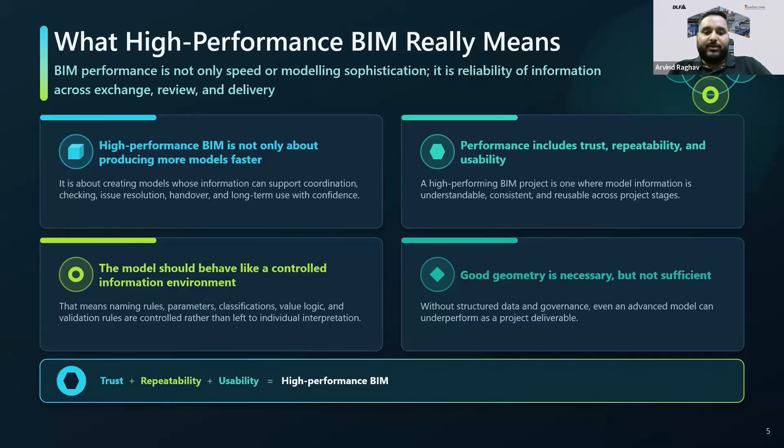So since, Arvind, we are talking about BIM performance, in your experience, what is the biggest source of BIM performance loss in any environment? Is it just the unclear requirements, inconsistent authoring, or just bad checking? Yes, I think it's a mixture of all of them, what you have mentioned, because it's not just about one thing. This is what I have also covered in the presentation. So basically, BIM projects lose performance because of, I think, four main reasons.

So the requirement is mainly: why do we need a BIM model, why do we need to create a BIM model, and what kind of information requirement we will have from the model is normally trapped inside documents. So whenever we do any particular project, we always create EIR, BEP documents, and all of these documents. But ultimately, we both have worked in the industry, and we have seen that the majority of these documents are created in the initial stage of the project.

But when the project moves at a faster delivery pace, especially in Indian projects, nobody really looks at those particular documents after a certain stage. So that is one of the major challenges, where we have defined initially what information we require and everything, but we don't look back to those particular requirements. So that is one case scenario where we lose the overall performance.

Then the quality checks nowadays are more or less manual and more or less reactive. Once we find out that there are a lot of clashes, or maybe the quantities are not matching somehow, or there are some errors in the model, then we try to find out what's the issue, why these quality mistakes happened, or why we are not able to use the model for handover purposes, for different data extraction.

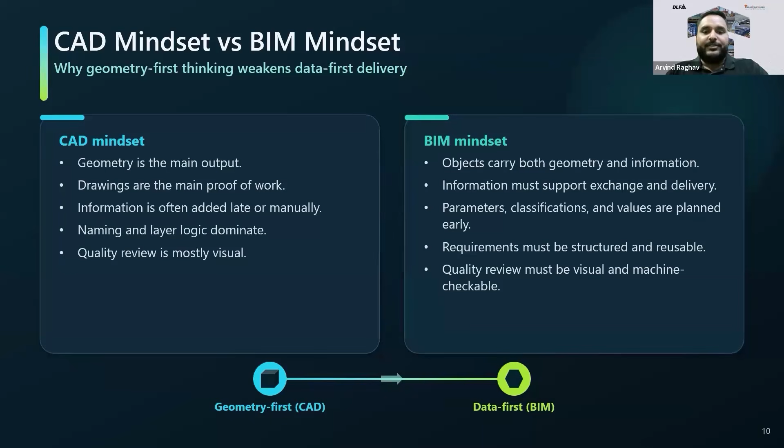So this is how the CAD and BIM mindsets differ from one another, and we all need to think about shifting the mindset instead of just adopting different software.

Can I just ask you a question? We have a lot of architects, generally, as students. So they would be the initial model authors for any project. What is your recommended software? Let's say it's a very, very early stage of a project. They are going to conceptualize it. What is the recommended software from your end that they should start with, and then they can proceed with Revit or other software?

That's a really good question. Personally, I have also implemented this in one of the organizations where I worked. Autodesk Forma is a great tool which I personally prefer for concept modeling. I will tell you exactly why. It's not that it has some magic feature where you just type and it will create. No, you will have to create something yourself. But the best thing about it is that it is connected to the entire BIM workflow.

So if you create anything in Forma, the way of creation for an architect who wants to create a concept stage model or a design option is the same as in SketchUp or any other tool. It is very similar. It takes the same amount of time as well. In fact, I would say it takes a little less. It will not take more than that.

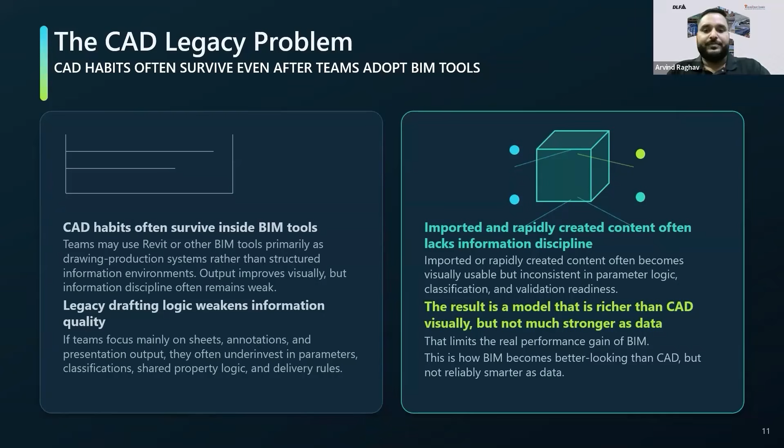So now coming on to the fourth segment of today's discussion, which is basically what BIM data governance means in practice. We have talked a lot about what it should be and why it matters. But now we'll go on to how this will actually look in an actual project, or how we can implement what we have talked about today. Before jumping to that, we need to understand what data governance actually means in BIM.

Data governance is often misunderstood as bureaucracy or documentation overhead, which is slightly true as well. But in reality, it is project information quality at scale. It makes the project predictable. It tells teams what data matters, how it should be structured, who owns it, and how it will be checked. Correct. All of this is basically data governance. It is not just creating a document defining what needs to be there.

So, in a high performance BIM environment, governance is what allows the quality to be repeated across projects instead of just relying on an individual effort. So, for organizations who are working on multiple projects of similar types, data governance is the most important thing when they are implementing BIM.

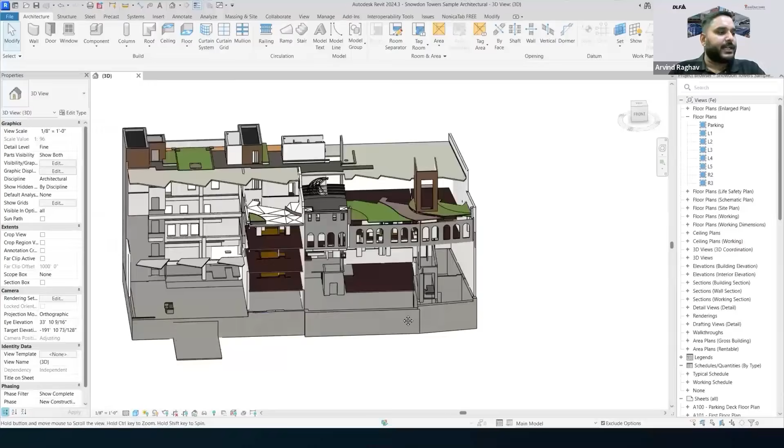Now we'll come to the interesting part. So I will just share my model on the screen. So this is a standard Autodesk marketing model, not a DLF model. So in this, let's understand two things. One is, let's say we want to check whether the required information is there inside the model elements or not. As we were taking the example of the door during this class, here also we'll take the same example of the door.

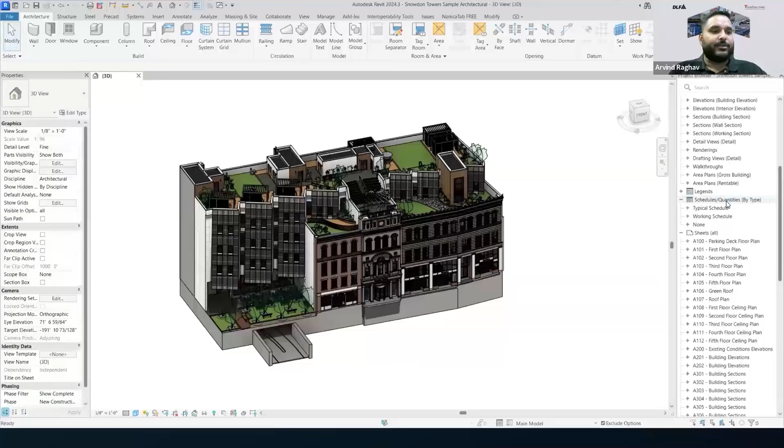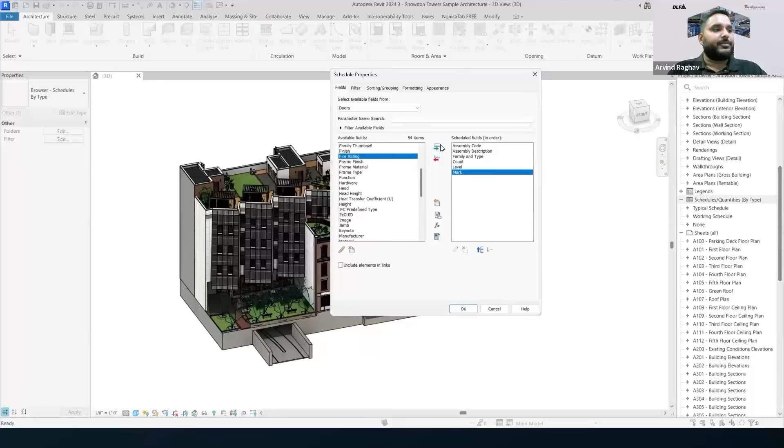So first of all, let's create a door schedule so that we get the different data that we require. We'll go to the schedules, select the door, and then we get the options to choose which properties we need in our schedule. So we'll choose the family and type, then the count. We also need the level at which the door is and the mark value. And let's also take the fire rating value. Just click OK and you will see the schedule.

Now we need to sort this schedule first of all according to the level so that we are able to understand it in a systematic manner. So this entire schedule of doors in this model is now structured according to the different levels. Let's say on level R2, which is roof 2, we have these many doors. Each door has an individual mark value, and the fire rating is also defined. And you can also see that in some of the doors, it is not defined.

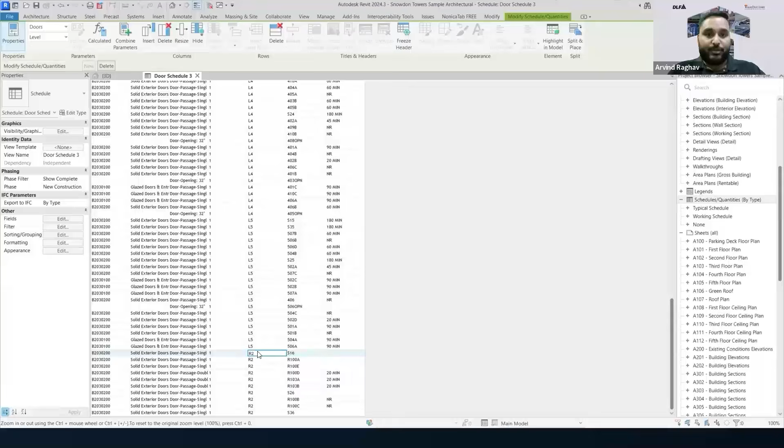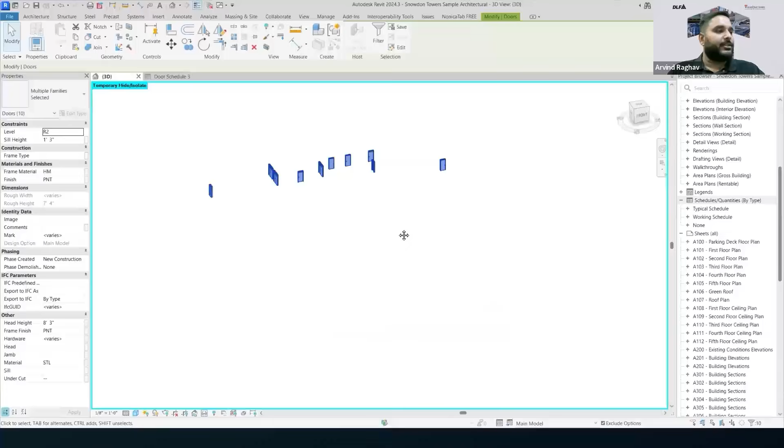It is blank. So let's say we have to check on R2 level doors how many doors have the defined value, whether it is correctly defined or not, whether it is in the format that we require, and whether it is empty or not. So I will just select all the doors over here and hide isolate so that we can only see those particular doors.

Because for today's session I do not have access to the Solibri and BIMcollab platforms, I created a Dynamo script in the morning so that we apply the rule set that we have for IDS through Dynamo. The same thing will happen in Solibri and other platforms. It's just that they have an inbuilt script where you define your rule sets, the requirement and how you want to check the data. That thing we have manually defined in Dynamo.

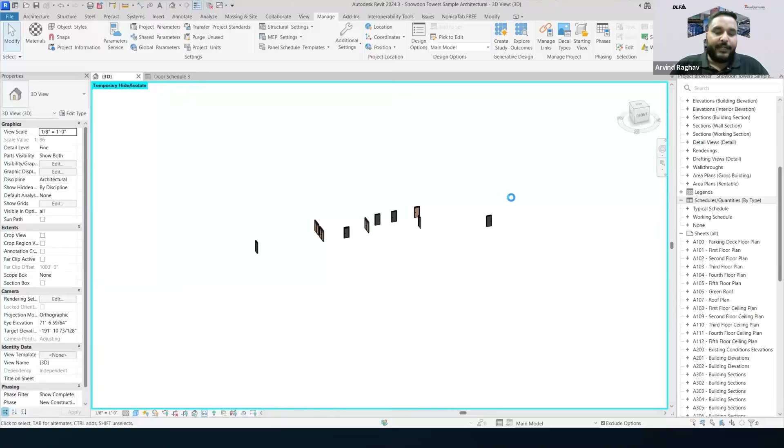It is taking some time to open, and Dynamo, for me, is a very unpredictable tool. Yeah. You never know when it's gonna work. Yes.

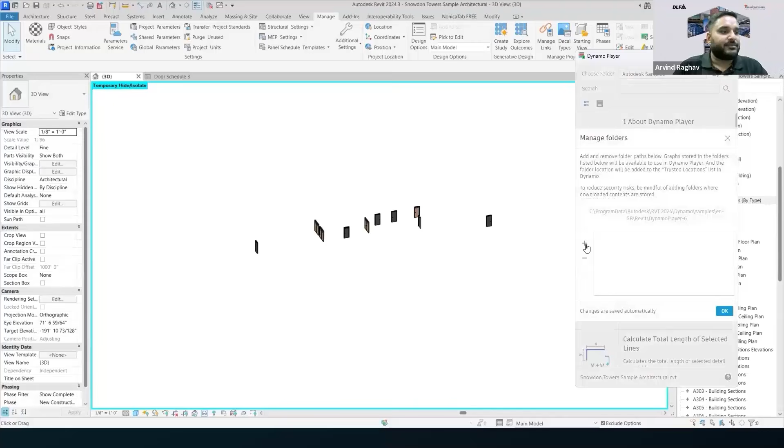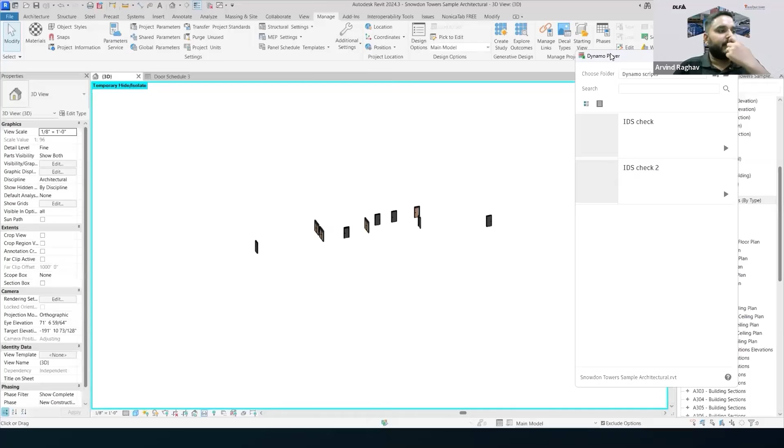Okay, for now, because the Dynamo window is not opening, let's go to the Dynamo Player so that we can run our scripts. Here are the scripts. For this session, I created two different scripts with different rule checks or requirements that we need. So the first requirement that we are going to check is, let me just try if it opens from here or not. It's not opening. That's okay, I think we can run the script.

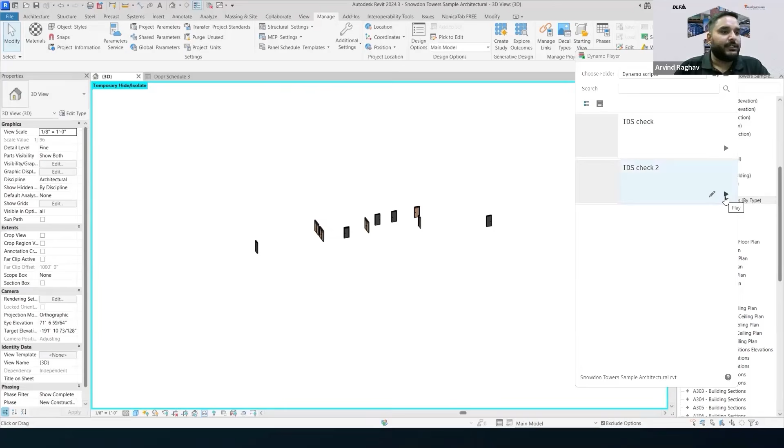Yeah, definitely we can run the script, but I wanted to show inside the script what exactly we are running for, and we need to change the values as well. Let me try to reopen it. According to your rule set, you have to adjust the values, I believe. Yeah, according to the rule sets, we have to adjust the values because we're not using the actual platforms for IDS, so we do not have a user interface to change that.

Correct. So in Dynamo, you can directly change it inside the script. That's why Dynamo is very unpredictable. But this will open up at a much faster rate when it is not in a master class, when you're sitting alone and working, this opens up instantly. When I was actually creating the script, it just took me around an hour to create it, and it was working perfectly fine. In fact, I checked it multiple times that it should work at the right time, in the right manner. But yeah, it's very unpredictable.

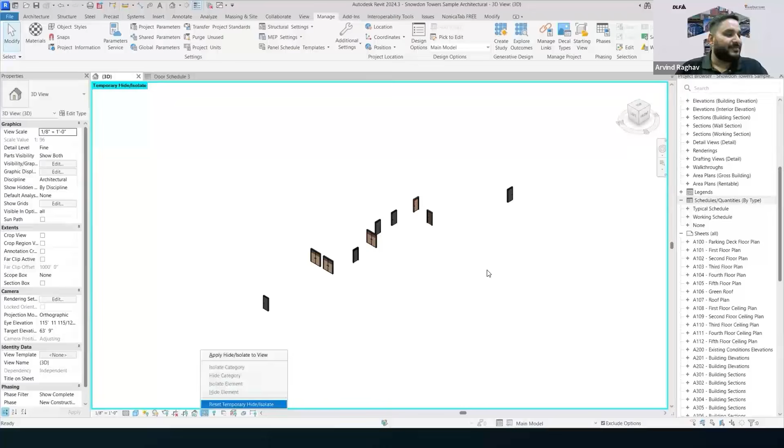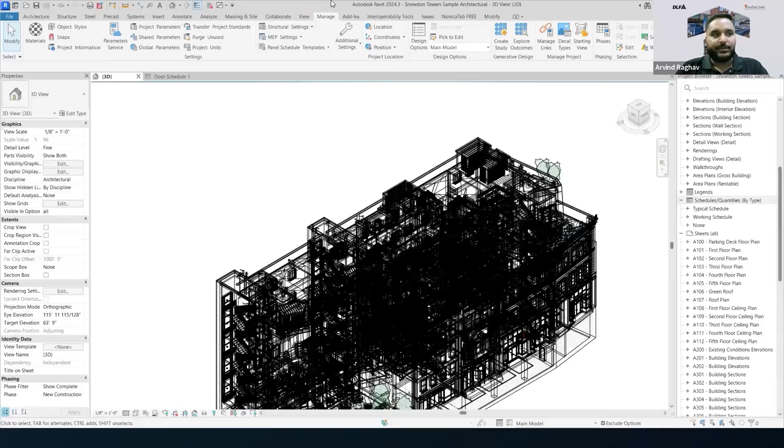Okay, I think we should continue with the presentation. In the meantime, Arvind, what you can do is keep the view as hidden line or something, that will reduce the load on graphics, and then try opening up Dynamo. All right, I will try to keep it open in the background. We need to continue with the presentation. If it opens up, I will show it in the middle. Sure, otherwise let's continue. That's just bad luck.

Can you just at least explain the logic to them? Yes, yes. So what exactly I was going to showcase in the demo was we were checking the different doors in one particular level for different parameters.

We were checking for the fire rating parameter and the mark value. So for the fire rating parameter, we were checking which all doors have it. We had two different rule sets. One rule set was checking for the specific information of which doors have a 90-minute rating, a 60-minute rating, a 45-minute rating, or a non-required one. In rule one, we were checking the specific requirement and how many doors pass that particular requirement and how many doors fail it.

So what the Dynamo script would do is all the passed doors will turn into green color and all the non-pass or failed doors will turn into red color, so it's easily identified in a 3D view which door needs to be corrected. The color of the door would change so you will be able to easily identify which door needs to be corrected. So that was one rule set.

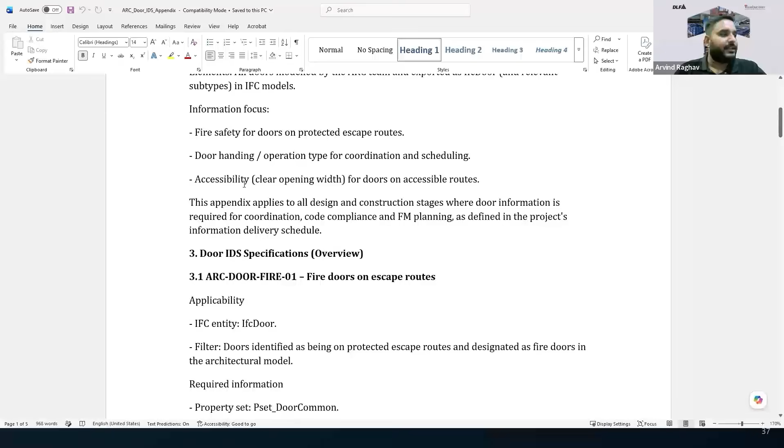A lot of times we see that BEP is normally not written in a particular manner. So in the BEP, I've created this document only for architecture doors because we were talking about doors today. But in this same manner, you can define it according to different disciplines or project requirements. So the first is the purpose, then the scope, what it applies to, different things, then the particular specifications of different elements.

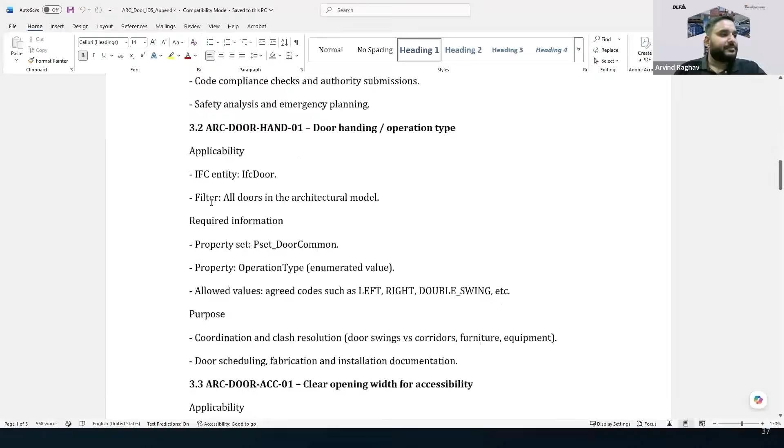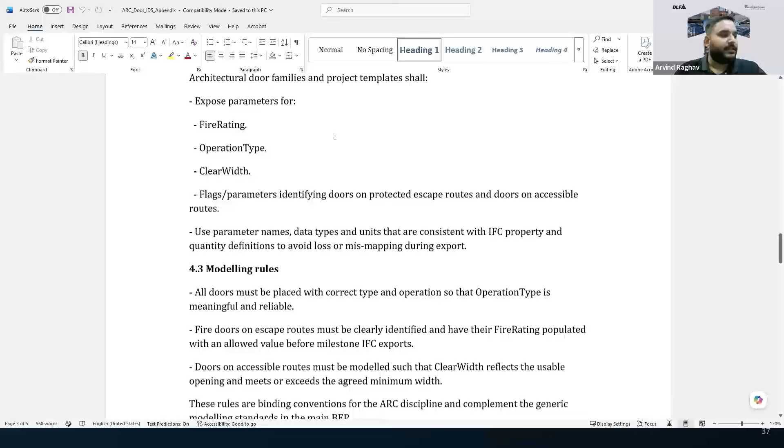So if you're defining specifications for MEP elements, it will have different specifications for pumps, valves, control units, and everything. Then the different clear openings or whatever the requirement is. Then you need to define which project templates will be used, which families need to be utilized, and then the modeling rules, everything. So this is how you can define it.

I will share this document with you as well so that you can circulate it if somebody requires it. This is how it needs to be defined, and this is added as part of the BIM execution plan, as appendixes.